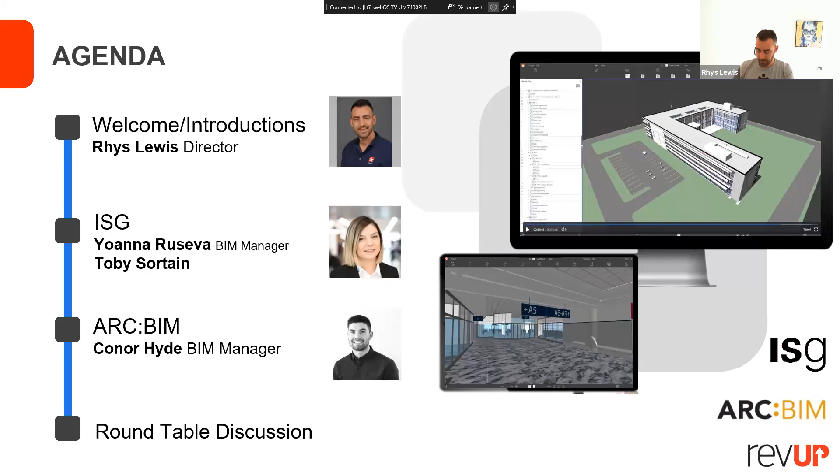Our customer base continues to grow rapidly year on year, so there's just a handful of some of the organizations that are using Revizto. Globally, it's over 150,000, so we've seen tremendous uptake, and you'll see why as we get into the presentations.

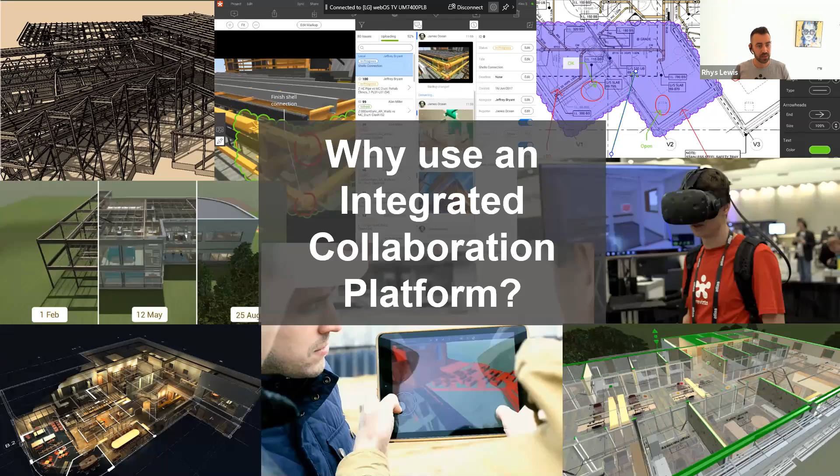We offer an integrated collaboration platform that allows project teams to communicate in a much more efficient digital way. I won't dwell on that too much. The reason we're here today is why should you consider using an integrated collaboration platform that is Revizto, or employing ISG or ARC:BIM. With that in mind, I will get straight to it.

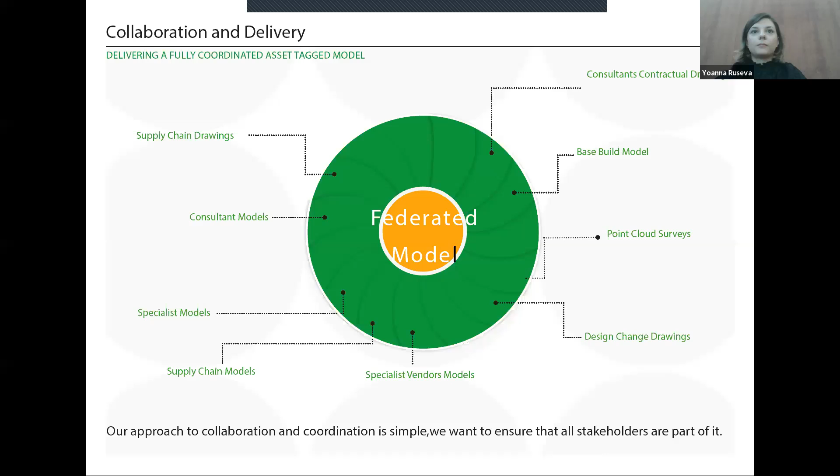After a quite big research and a lot of trials, we found out that Revizto is the right solution for us. We began our journey with Revizto in August 2019 with a simple trial of 15 users. Quickly, we implemented it on 6 fit-out projects, and we're continuously implementing it on every fit-out that currently comes in.

Throughout this year, Revizto has enabled us to have one interactive platform that has allowed every team member to view the model, view the drawings, and feel that collaboration is happening between everyone.

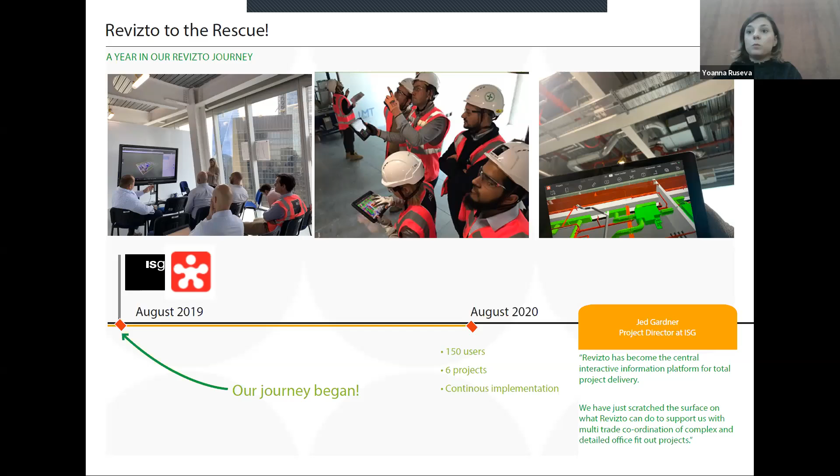Revizto has helped us immensely throughout our coordination and issue tracking progress. We usually have a week or 2 to mobilize our supply chain and ask you to prepare the federated environment. Because of that, it is really important to us that everything sits in one place. We have weekly workshops utilizing Revizto

and the models that are there. All issues that are raised are being tracked through the platform. Before, we had to spend enormous time actually producing those clash detection reports, sending them to the trades, and this would take at least 1 or 2 days.

Nowadays, we do that just automatically. In the beginning of the coordination process, we set up the automatic reports and the issue tracking progress meetings.

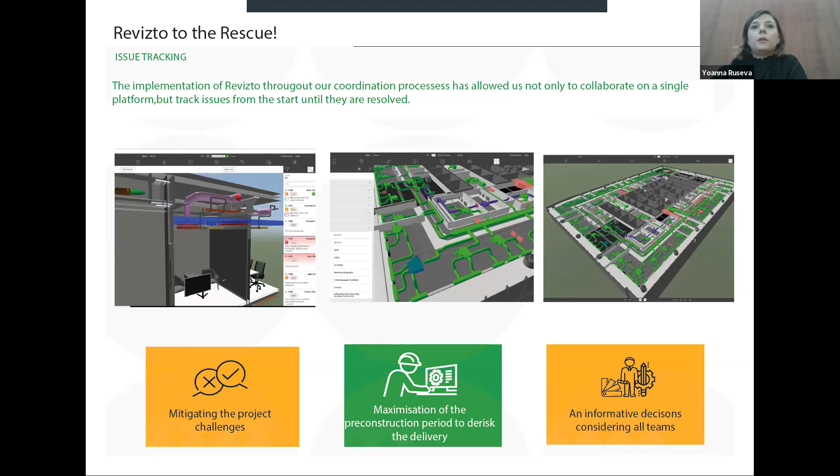The implementation of Revizto has not only allowed us to collaborate on a single platform, but has allowed us to track those issues from beginning to end, has allowed us to maximize our preconstruction period, and utilize the automatic reporting features from Revizto that are sent to our trades, to our consultants, and to our client.

Those functions have allowed us to be more efficient, have allowed our design teams and services teams to use the models as their reviewing tool.

We use our workshops with the models open, and we don't actually review drawings within the workshops. We want to make sure that everyone has the latest information to make the right decision. This has allowed us to maximize the pre-construction period and de-risk any delivery challenges beforehand.

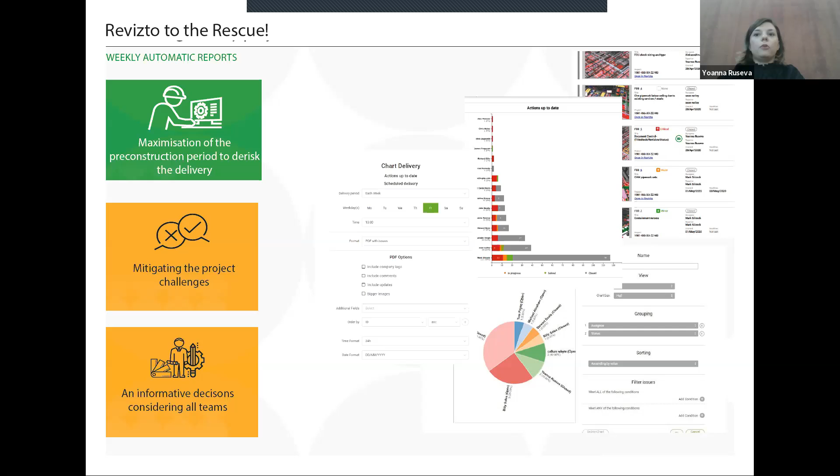We as a fit-out company have always felt that there's a missing link between the trades and smaller packages that don't have the capability to model in 3D, and the bigger packages that are relying only on the models. Revizto has helped us link everyone together.

The function between 2D and 3D overlaying has allowed us to link everyone together. Now everyone is working and collaborating in one place. All drawings are being loaded within Revizto.

During the coordination meetings, when someone asks, where am I in the model, we can quickly switch between the 2D and the 3D. We can always have an overview of how many issues there are and what's the problem area that our teams need to focus on.

Not only that, but this overlay helps us with the site walks and implementation of the snagging tools.

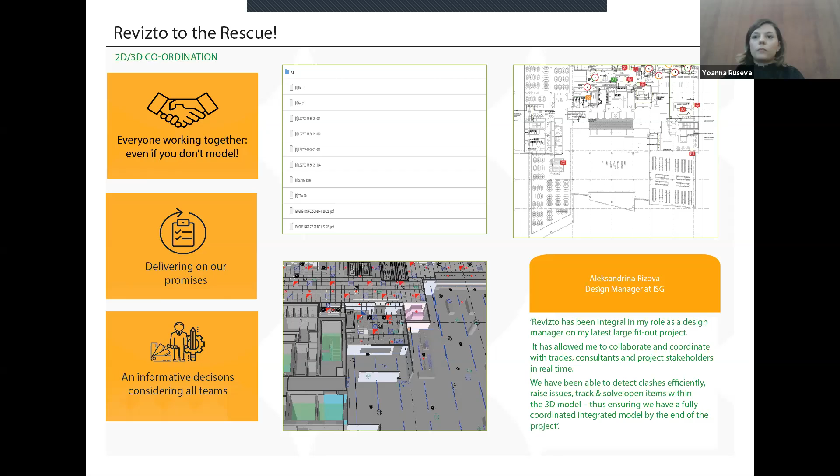As for everyone else, 2020 has been quite challenging. We had to switch to working from home and not being on site. However, in March 2020, we realized how much Revizto can help us do that.

Our coordination processes did not change when we started working from home. We had already established our cloud-based environment.

We've had very positive feedback from all our clients that everything can be built in the cloud space, that they're not required to come on site and review thousands upon thousands of drawings or snaps. Everything right now sits in Revizto and is linked. All team members are able to do it.

The only difference right now is that instead of doing the trainings on site, we do them online, which is quite nice.

The next steps for us are the utilization of the new version of Revizto on site as a snagging tool, which we have already begun doing, and the 2D 3D overlay has helped us immersively get those people who don't like the actual 3D environment. They look at the drawings and then they switch to the models.

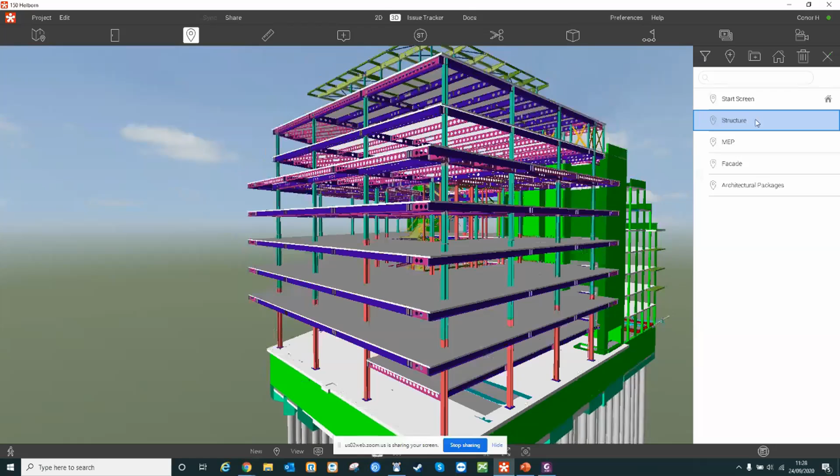For ease on this project, we've set up different views for them so they can quickly view the superstructure and substructure. They can quickly see all of the MEP services, focus on the facade, and then as we get into construction, they can just focus on the architectural packages that we currently have in the project.

The issue tracker allows our clients to see valuable past meeting information and conversations that they would have traditionally been left out of, verifying critical information like specific pieces of equipment or features within their building. Some examples of this on this particular project: the client has been involved from the start, and we were able to basically resolve some issues with the lift brackets being shown.

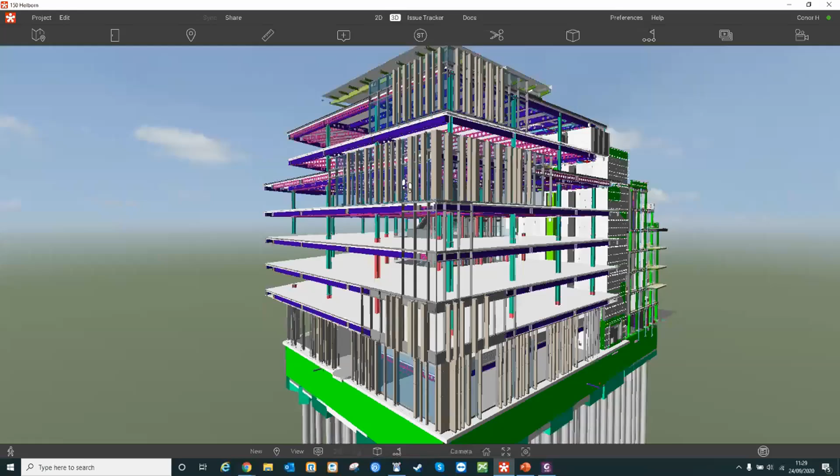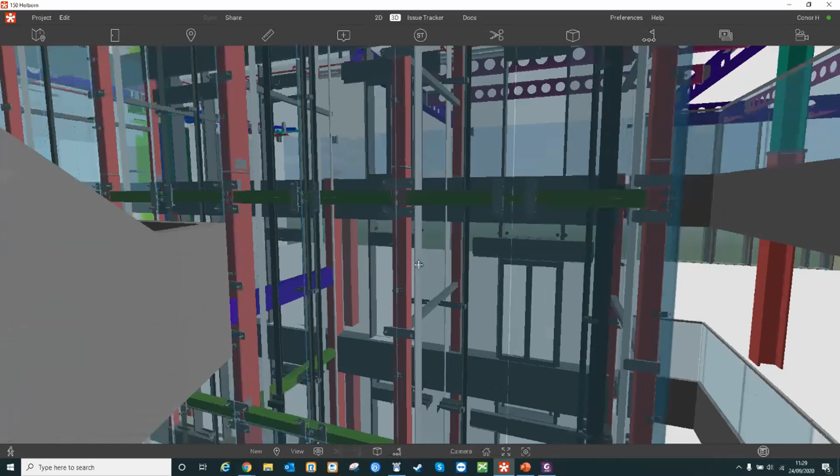During the design of this project, the lift was a central part of this building in the main atrium, and the client had noticed from the model that some of the bracketry that supports the lift glazing was quite heavily over-designed. We noticed this from the model, and it was something we probably wouldn't have picked up on 2D information. By using Revizto, the client was able to raise these questions, and we were able to have coordination meetings and resolve it using the model.

Some other issues we'd found were with certain features that the architect had designed. Specifically here was an access ladder onto the roof. You can see the architect's design ladder had come out further than when the subcontractor's design had come on board, they had fixed it back. So questions like this were raised, and we tried to find the best solution for the client, because at the end of the day this is their building. But we also tried to integrate and take on board what the subcontractor was saying about how ladders are fixed back.

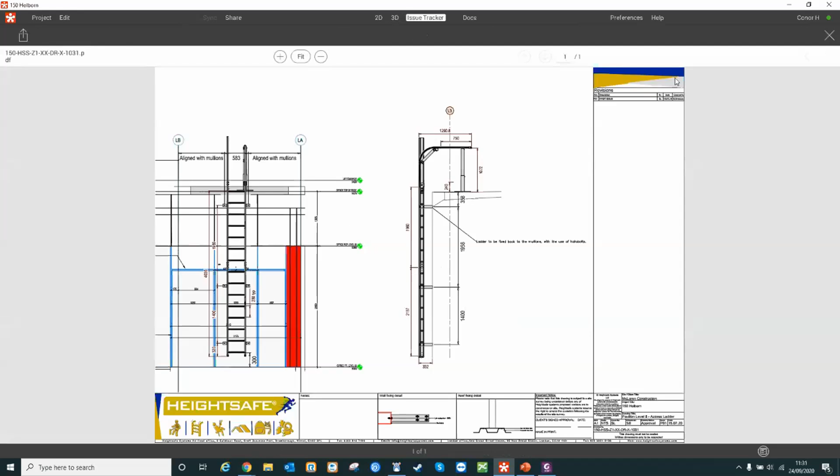Within Revizto, pictures and markups are a very important thing, along with adding comments. As you can see from the chat history, we're able to quickly open up the subcontractor's drawings, see exactly how their details were working, and get more input from them and the client together.

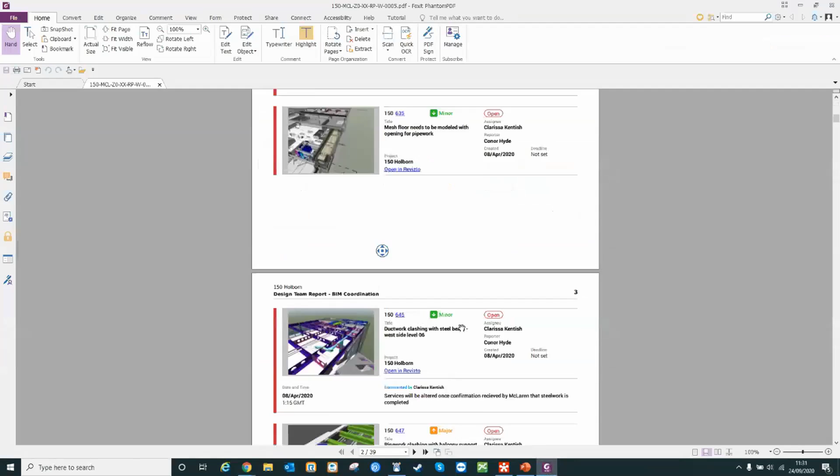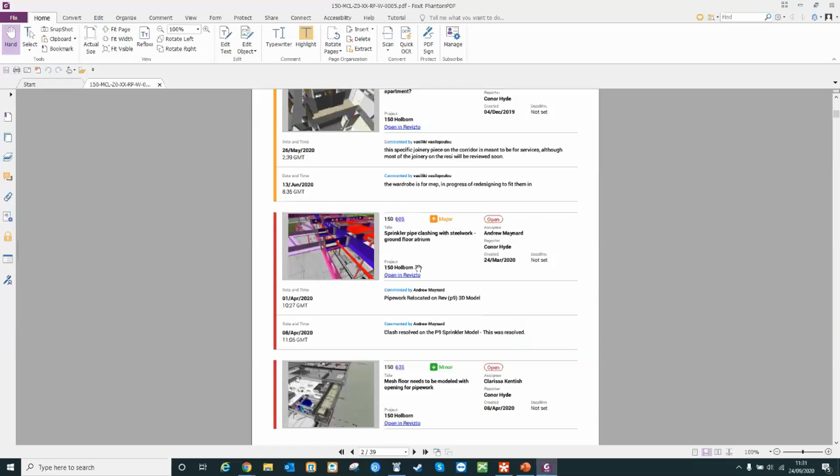Another thing that helps us with clients is having the dashboard feature for reporting. Having access to reports allows the client to see, at a high level, what's been going on in our bi-weekly coordination meetings. Reports are produced showing all the issues we've opened, closed, or that are in progress from the past few weeks, and also keep a record of all the chat history between each issue.

We've noticed our clients are now playing a more integral role throughout the project at a high level, and users can view live feeds to the project, monitor, track, and report on tasks, and understand the overall project status. Upon project completion, all project information such as COBie data and Uniclass 2015 classification can be packaged together in Revizto to help our clients and their facility managers for the lifetime of their project.

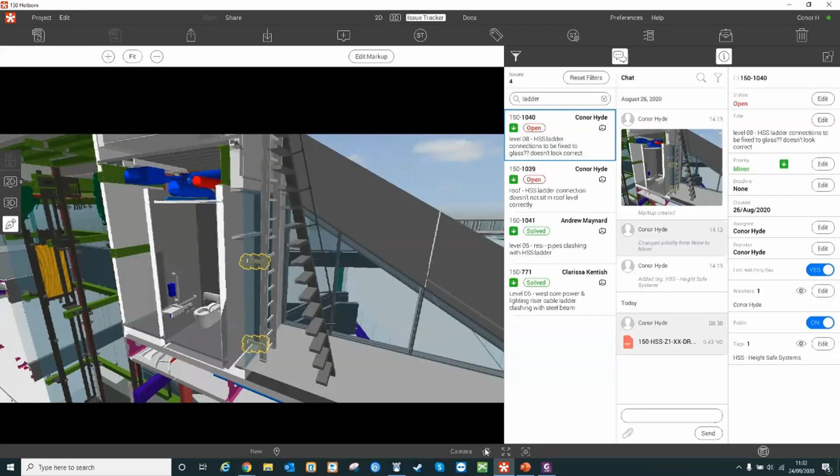I'm going to talk about how we've been using Revizto with a contractor, which is primarily our main role on most projects. Inaccurate communication and information transfers can cause major project setbacks that cost contractors time and money. By giving the contractor early access to project information, it has allowed them to reduce costly issues throughout the project life cycle. Contractors are generally isolated from the design process, impacting their ability to convey general construction knowledge to the design team, resulting in significant rework before coordination can begin.

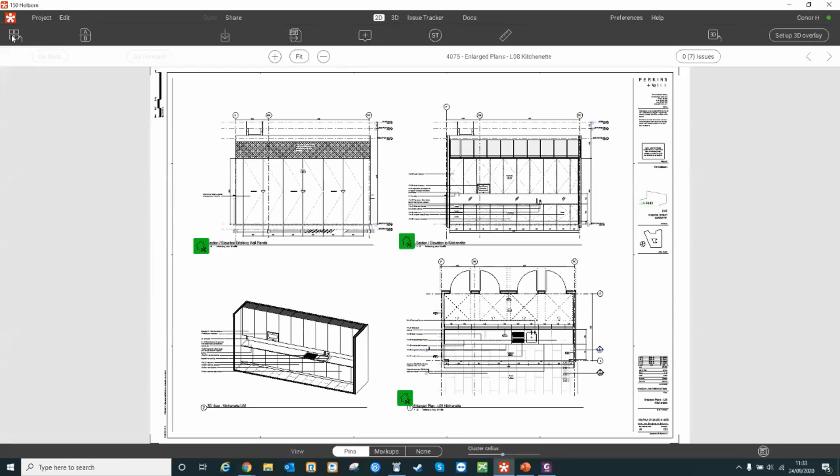Revizto allows us to overlay 2D and 3D information and gives contractors the ability to share versions across teams. Users can see all integrated sheets, PDFs, and even Revit sheets that have been brought in by users, and can be confident that what they're viewing is the most up-to-date version.

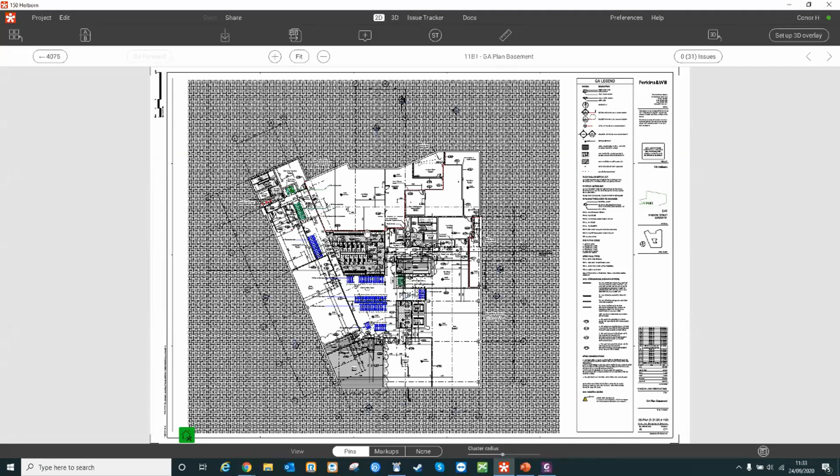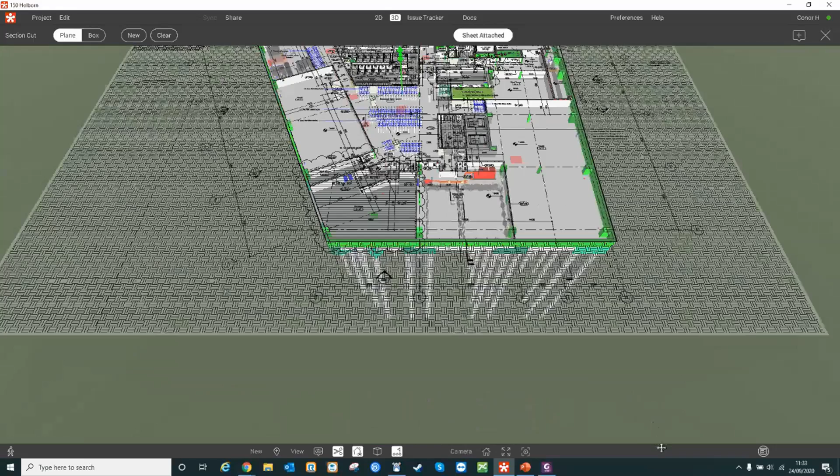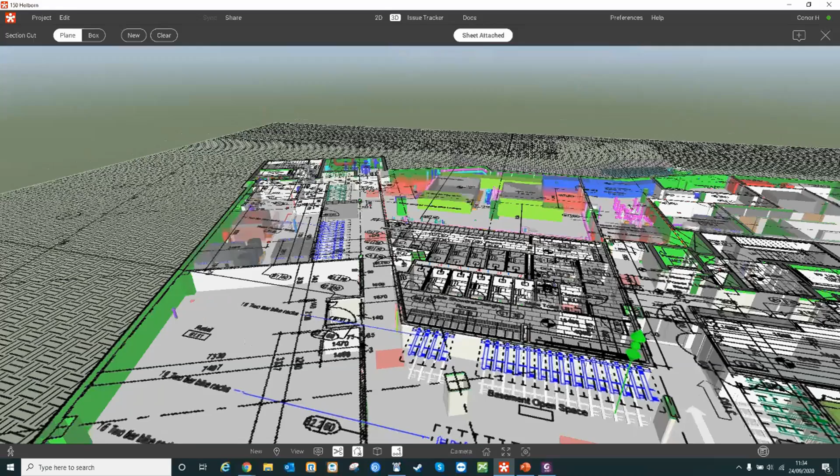One of the really good features we can sell to our contractors is the 2D feature, which you can overlay onto 3D. This is probably my favorite feature of the platform, because a lot of contractors, I don't want to say older people, but some are more used to viewing things in 2D. This feature bridges the gap between the more modern way of viewing things in 3D while keeping the ability to bring everything in 2D as well. This is one of the features that's really helped us in coordination, and it also helps us navigate buildings and helps the main contractor see what's physically going on both in 2D and 3D.

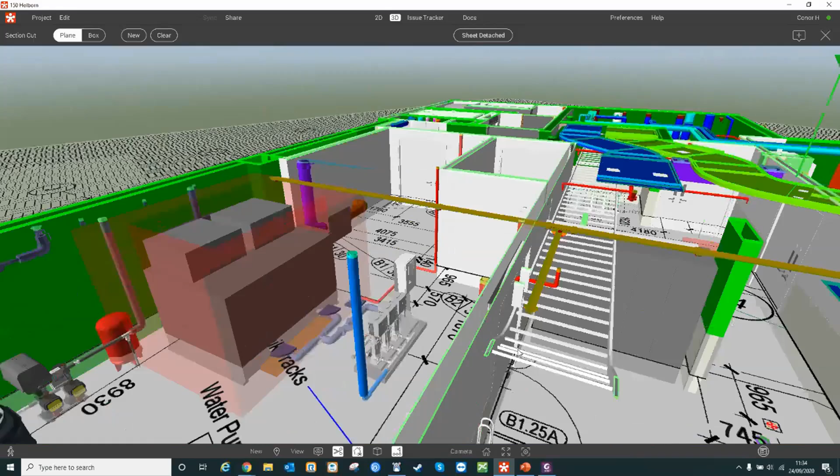And then the dashboard feature gives contractors high-level project information alongside customizable charts to view the overall project health or filter down into individual assignees. These charts provide project managers a better understanding of their project and actionable information at the project level.

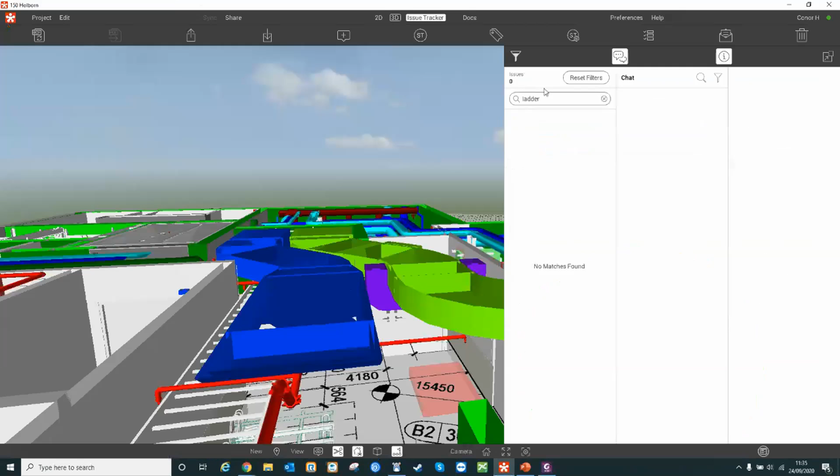Users can quickly access, assign, and manage project-related tasks such as open issue private groups. The issue tracker allows contractors to categorize issues, automate tasks, and ensure completion, driving accountability within their supply chain.

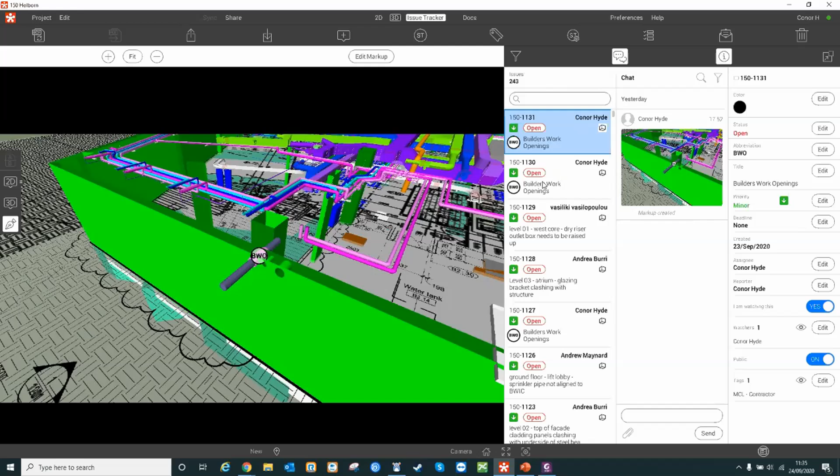We've found that using the stamp tool for focusing on builders' work openings has helped identify areas that were missed on traditional 2D drawings, and has helped create reports back to the main contractor to catch these issues before we get to site. By leveraging Revizto as an integrated collaboration platform, contractors can eliminate communication issues from ill-prepared coordination meetings and human error.

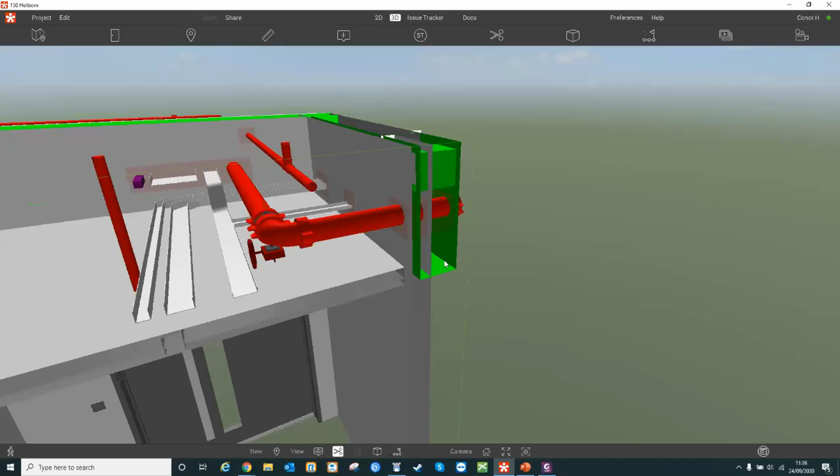Meetings on site can become more proactive by utilizing Revizto on iPads and mobile devices, virtually building and viewing all project data in real time from an easily accessible platform. Some areas we have looked to develop and assist the contractor is by identifying CDM hazards within the models, so site managers are constantly aware of what's happening around them, and also using the video tool to record stuff like site inductions for subcontractors arriving to site, so that they know exactly where they need to go by using the latest model and live project information.

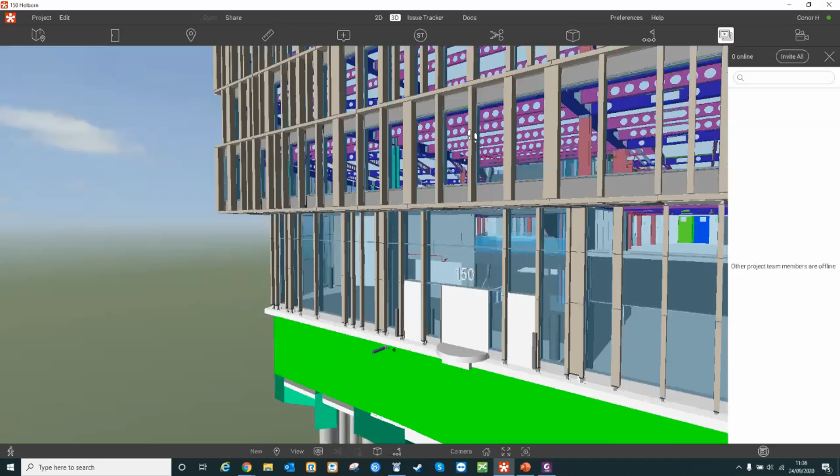So this is something we'd be looking to do with our contractors in this project, but we still have room to sort of implement these processes going forward.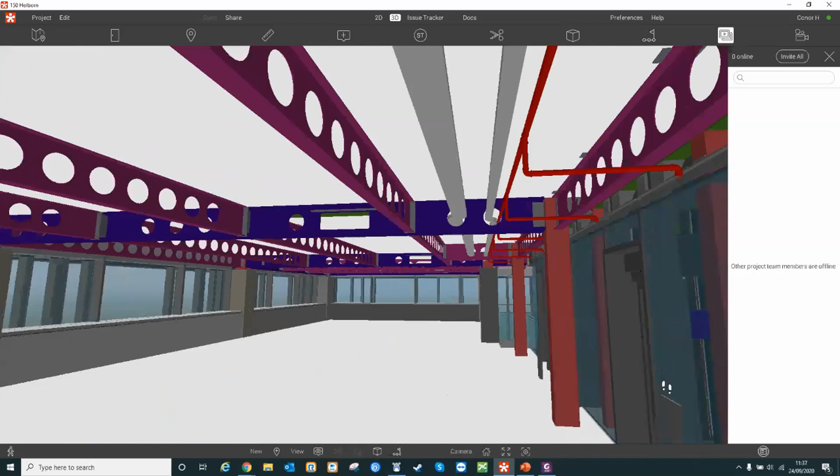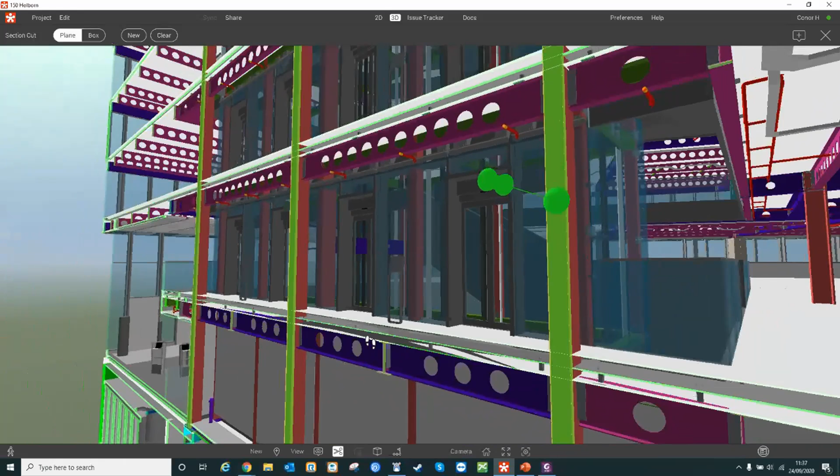So this leads me on to talk about our subcontractor use. For years, subcontractors have relied on manual processes to pass construction and design information across various teams, leaving room for human error that causes project delays and generally leads to additional costs. By using RevizTO, it allows all task team members to account for constructability constraints before they become an expensive rework. Subcontractors can overlay 2D plans with 3D models to provide better context for their fabrication on site.

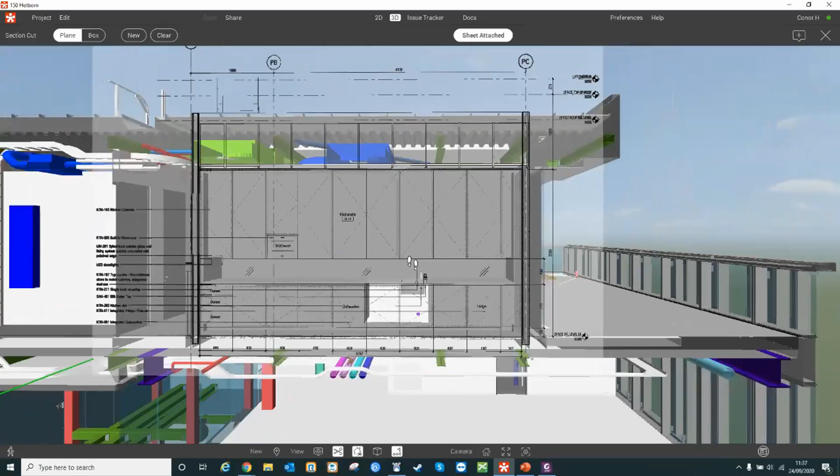So, for example, we've taken the kitchen drawings, and we're able to overlay that with the model they've produced. We've got all the notes from the drawing listed on it. We can cut that back to see the carcass of the wardrobe. We can now start to see the water heaters that are being put in, so we know that some cupboards will probably be fixed closed, and this also just helps visualize it again in the 3D environment.

Subcontractors are empowered by having access to real-time updated data. This allows them to find the information they need without having to wait for someone to return a dimension. All this can be done within RevizTO.

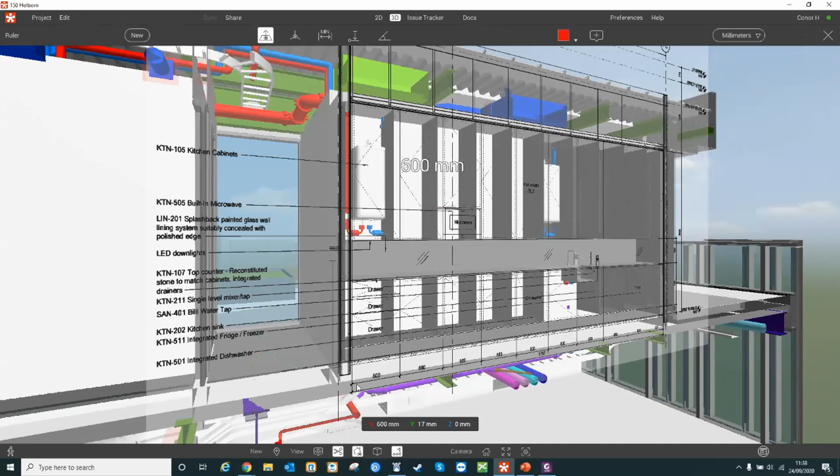Identifying and tracking issues via emails and phone calls is no longer considered to be the most effective communication method. It is now seen as a more efficient way to snap a picture from site, add digital markups, or add text, and execute all of this within the RevizTO platform. Users can directly assign tasks to other task team members and assign multiple watchers to any given task to drive accountability to ensure completion, all the while cutting down on delays from broken communication.

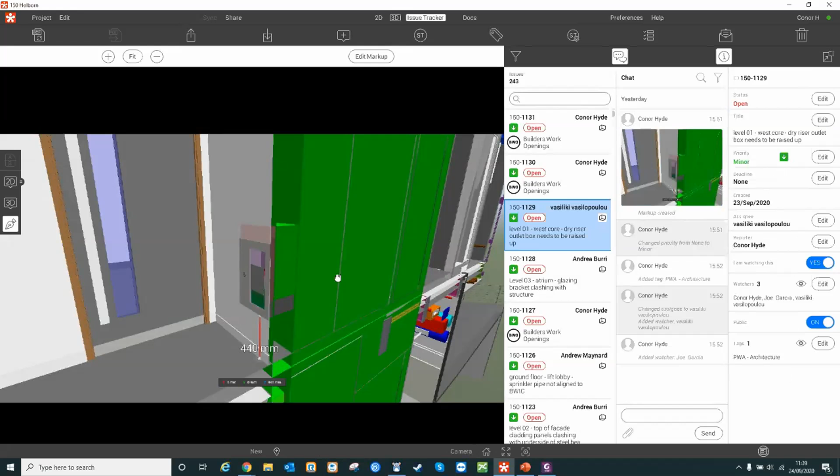RevizTO is helping us to eliminate information bottlenecks with real-time communication directly within the platform, enabling all team members to actively collaborate on site, from the office, or more commonly now with COVID, working from home. Users can communicate one-on-one or in groups, and then send instant notifications to all members of the team. Communication is all stored within the chat history.

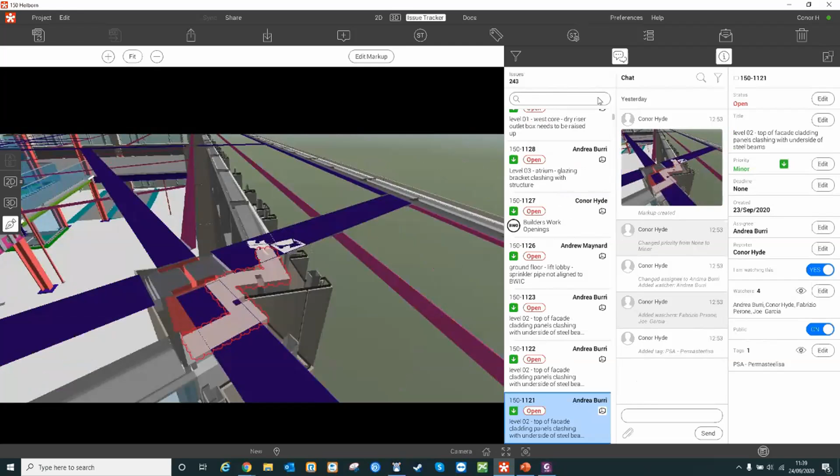And I'll just pull up some examples.

So like builders work, for example, is something that we're focusing on at the minute. So we've asked that 2D drawings be checked to make sure that builders work hasn't been missed in the models. And this is all trying to get our teams in sync to share their specialized knowledge to achieve better deliverables.

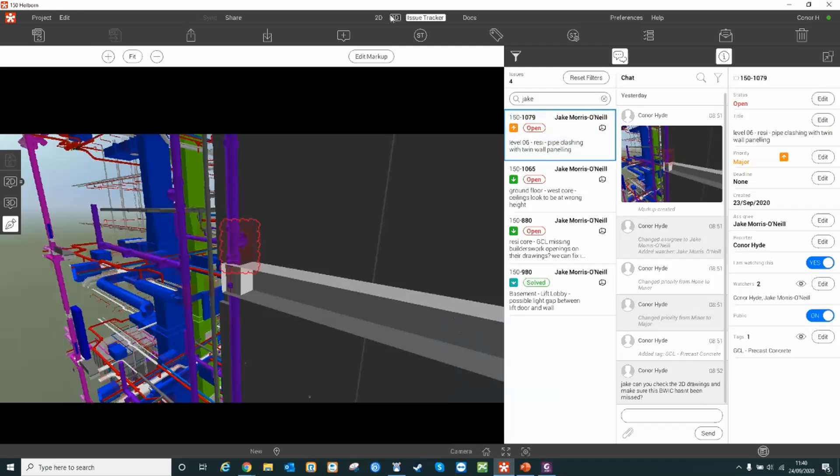Excellent work, Conor. Some really interesting comments. I've been scribbling down there myself, and it's great to see you empowering both your clients and some of the subcontractors. So where do you think the biggest benefit has been seen, if you were to compare a subcontractor to the client, who's, from your experience and your projects, engaged?

Yeah, I personally find that using RevizTO has helped us massively with the subcontractors, because traditionally they would have been just focused on 2D drawings and getting them signed off, but having the ability to actually view it in 3D and 2D together in one platform has helped them better understand what they need to do, especially when it comes to BIM and the level of detail that's required. Some subcontractors may not grasp exactly what's required, so having a platform like this, creating issues, having chats is definitely more beneficial for us to help lead them through their first BIM process.

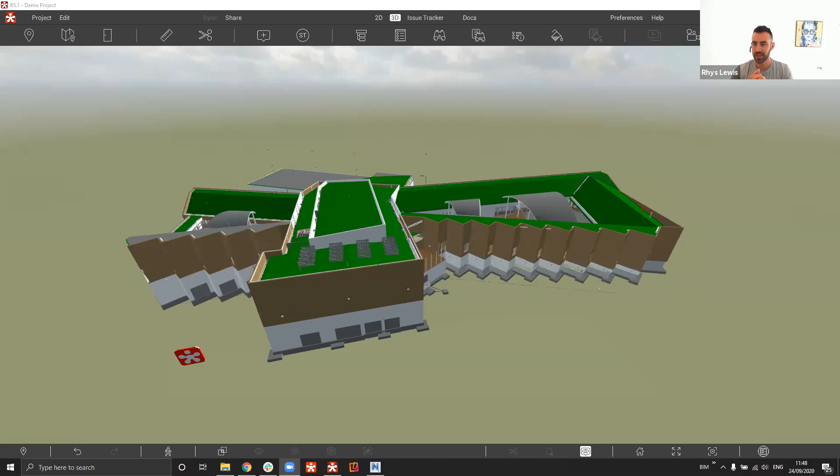Perfect. Well, lots of questions, which is great, and lots from Lewis. So as you've got the mic, Lewis, and we've got 13 minutes to go, why don't we jump into a 10-minute show and tell of what we've got coming, or what's available now, to take a look at with our clients. It's been great seeing these use cases from both ISG and ArcBIM, so thank you for those stories, and please do throw in any more questions if you have any. We've just gone into open beta for version 5, and I think as we've got a bit of time, it may be worthwhile giving you a sneak peek of that, Lewis, if you're up to the challenge. It wasn't on the agenda, but hey, why not? Yeah, no problem at all. So over to you, Lewis.

RevizTO 5, as Rhys said, is due for release pretty soon. A massive overhaul has happened. A lot of it is behind the scenes, and as a result, the interface is very similar to what people have known and used in RevizTO 4. So people that know RevizTO 4 aren't going to be too shocked by what they see in RevizTO 5. You've got that continuity and ease of knowing what you're looking at without having to get used to a brand new system, even though a lot of what we're doing has now changed.

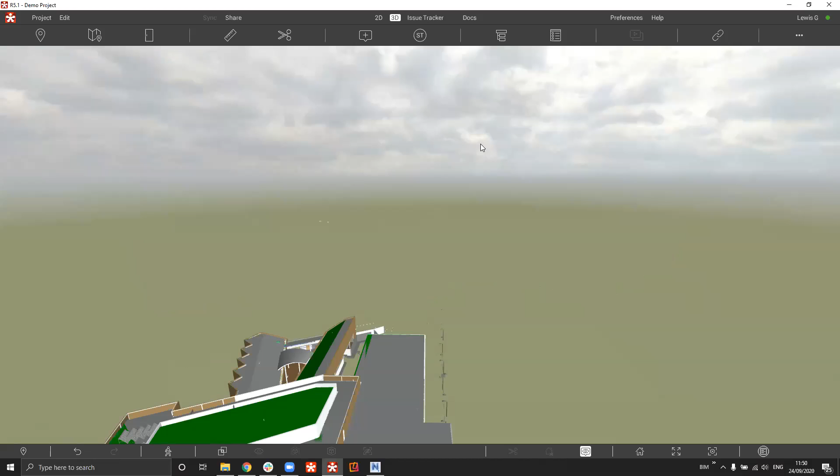Key things that have changed in RevizTO: we've now got an undo and redo button, which is going to be quite exciting for a lot of our users. It's surprising in 2020 to say we've just added that, but it's finally here, and it will undo anything we do in the 3D space. So if I change camera location, rotate the model, we can then undo back to previous locations, and redo to change that information. It won't undo anything in the issue tracker, but it will undo anything we do in the 3D view, so that's quite nice to finally have inside RevizTO.

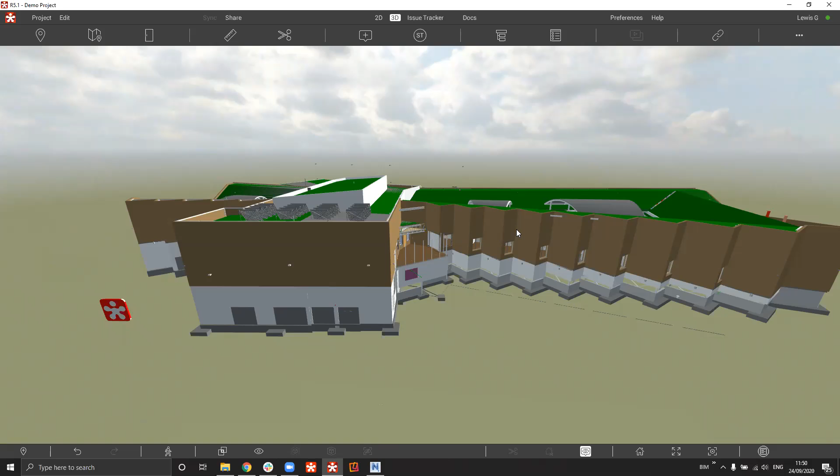We've also started to add buttons where before it was quite difficult to set things up. So we can now select components, and if we want to hide them, we've got a hide button. We've got these brand new buttons down here - turn clashes on and off, show everything, isolate in transparency, isolate components out, and hide things. In RevizTO 4, you'd have to go to the object tree and try to turn things on and off, and it was difficult to create those views the way you'd want. Whereas now I can just select the mechanical model, isolate that, and pull that information directly out of the system.

This works really nicely to allow you to set views up and store these into the project. Conor was mentioning the views he set up for different users - he'd have a view set up for a structural view and a mechanical view. It's fair to say that sometimes that wasn't the easiest thing to do. If you're going purely on model basis, it was okay, but if you wanted more detail, it was quite difficult to set the views up in specific ways.

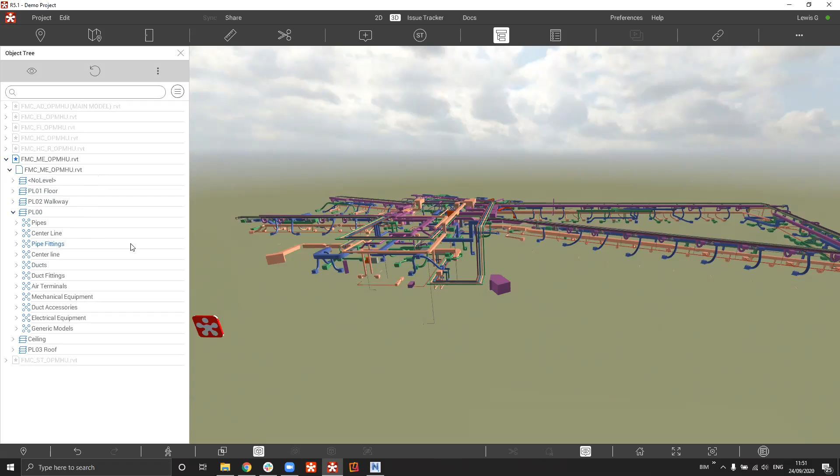Whereas now we've got the option to break models down by level, then by category. So for instance, I can now just take all my level 0 pipes and ducts, right click, isolate, and pull that information out directly.

The way in which we can customize the views so that people can see what they are actually interested in, rather than what RevizTO thought they were interested in, is a nice feature to have. These can be saved as views, and as the models update and objects get added, it will automatically keep those views growing on the project.

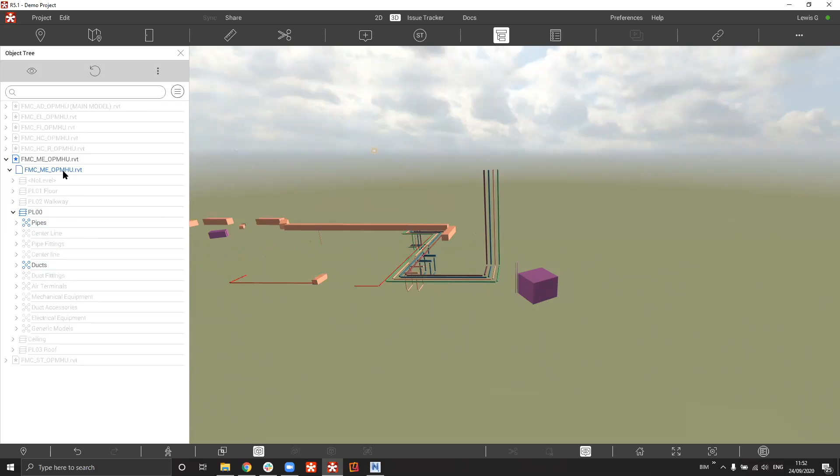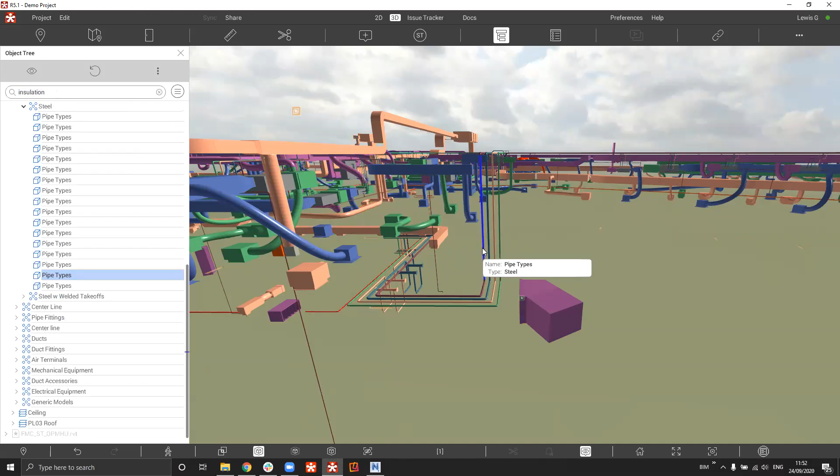Another nice feature we've improved is our search bar for objects within the object tree. One thing I always find annoying is when I select a pipe in the mechanical model, I'm actually getting the insulation and not the pipe itself. So we can simply type in the word 'insulation,' and it will find all the insulation in the project, and we can use the hide button to get rid of it. Now when I select a pipe, I'm actually selecting the pipe, and the properties I'm seeing are based around the pipe itself, not the insulation. This is a really useful new feature.

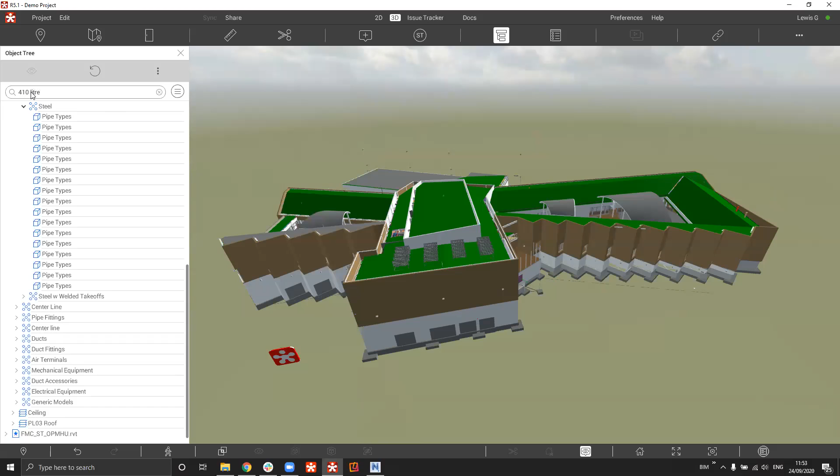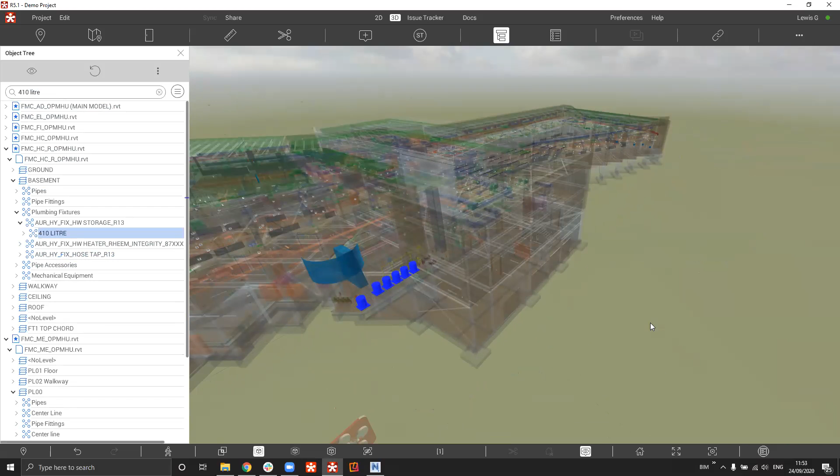We can also use the search bar if you know a particular size of component is in the model but don't know where it is. I know I've got some 410 litre water tanks, so I can search for that, isolate in transparency, and it will highlight those components for me in the model. Someone mentioned there was 410 litres, I had no idea where they were, and straight away I can see where those water tanks are in the project. The search bar and the way information is now structured in RevizTO makes it a lot easier to customize views and control what you're seeing.

Also new with RevizTO, the key thing is that RevizTO 5 looks the same as RevizTO 4, which most people will want, but there's a more advanced toolbar you can access by clicking on these three dots, which brings up the new features. We imagine it'll mostly be the BIM specialist people on the project who want to use these buttons initially, while the normal user keeps it as it was. They can switch between toolbars, and as they use it more, they'll progress into the new features and can access them quite easily.

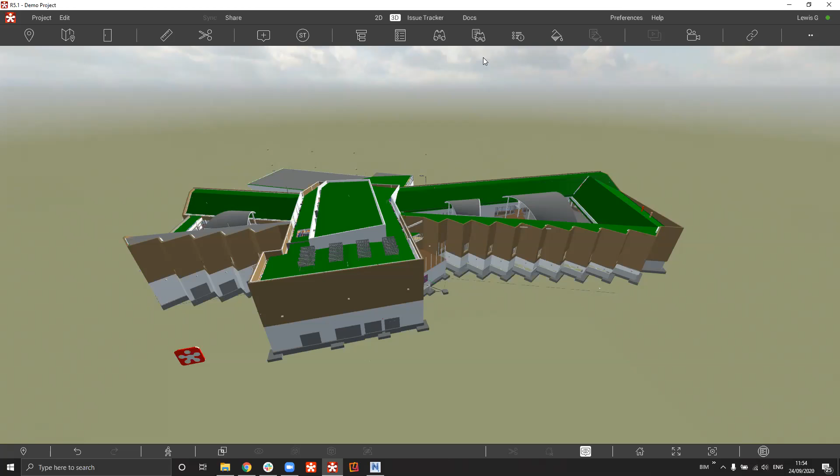One of the first things we've got is the ability to find objects. We can add property conditions - I can type in, for example, 'system classification,' and pull that out. From here, we can say show me all the domestic cold and hot water, and find all, and it will show me all the domestic cold and hot water. These can be saved as search sets within RevizTO, so if you're going to use them repeatedly, you can save that search and get access to it. This adds to what Conor was doing before with his views for different people - he can now work with search sets too.

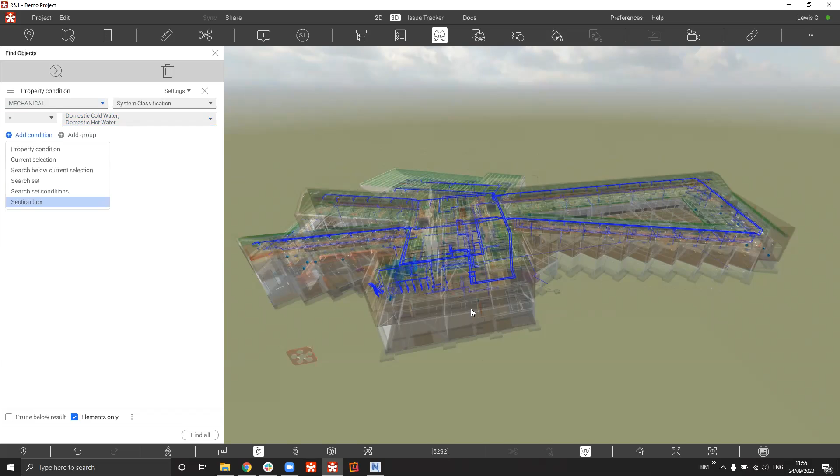In addition to search sets, just looking at the whole model, we can also add a section box into the search. Now I have to guess where it goes because it's hidden - there we go. So we can now set up a section box that's in a particular area of the building. In this case, I'm going to set it up just for this small section.

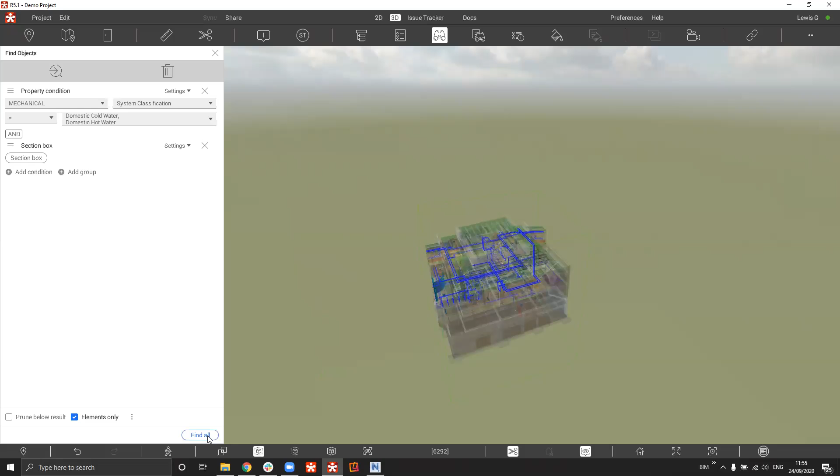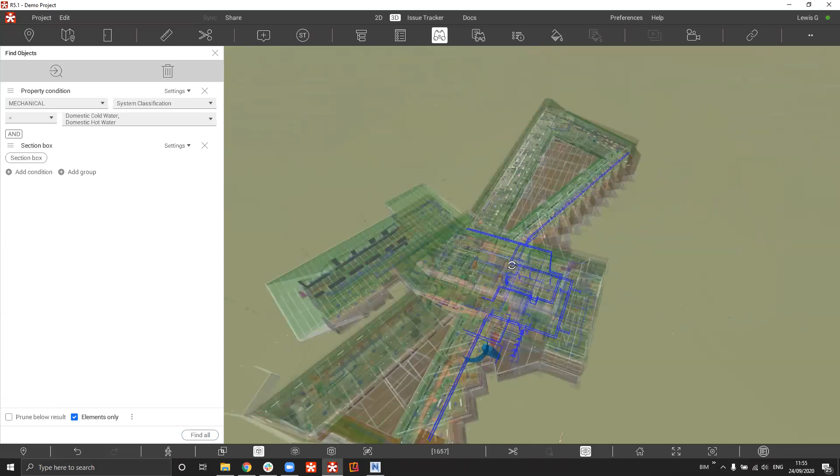When I did the domestic cold and hot water search, it selected around 6,000 objects. If I click done now and find all, it's only found 1,600 objects. If I turn off the section box, you can see the objects selected are the ones that actually intersected with that section box. So it's now possible to set up search sets looking at floor-to-floor section boxes or zoned section boxes, whatever it is. Obviously pipes that go into more than one area are always going to be a problem, but at least it breaks it down and keeps things more local, so you can have specific areas within the search sets. That's a really useful feature of the search items.

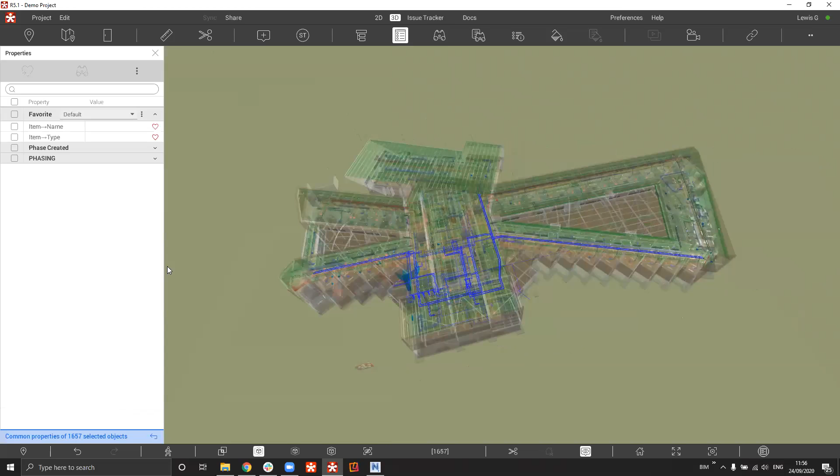Another nice thing we've got now is our properties have been improved. I'm just going to isolate this out and hide my insulation. In the past, if you were looking for certain properties in RevizTO, you'd have a huge long list of information to scroll through, because it's taking all the data out of Revit or Navisworks or whichever system you're exporting from. What we can now do is create favorites.

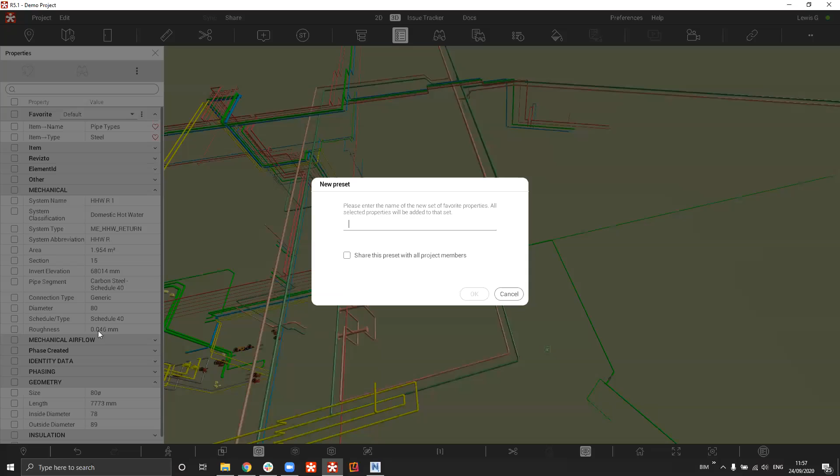For example, I want to create favorites specific for my pipes. So we can say I want my domestic, my classification, and my system type. I also might want things related to my geometry, like my length and my diameter. We can then add this to our favorites. I'm going to call this my pipe favorites, and this now is generated at the top. I don't want those two, so I'm going to remove those.

What that means now is I don't have to look through the whole list of data in RevizTO. I've pulled out the bits that are interesting to me, and as I click through the model, I'll see that data update for different purposes. This is a really nice feature, as different users on the project can have different favorites and see the information they're interested in. The favorites also act as a quick property, so I can just hover over a component and see those properties directly on the mouse.

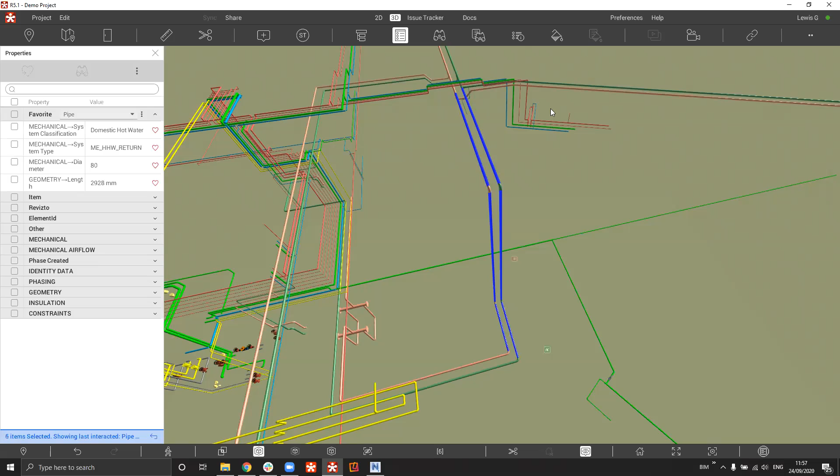One last thing with this process - I'm just going to give an example, selecting a couple of pipes rather than doing a whole thing. So I've selected these six pipes. We can now go into our selection inspector, and the headings for the selection inspector are based off the favorites we've created. So I've got domestic hot water, system type, so I can see flow and return. These happen to all be 80 mil diameter, but I've got the length here.

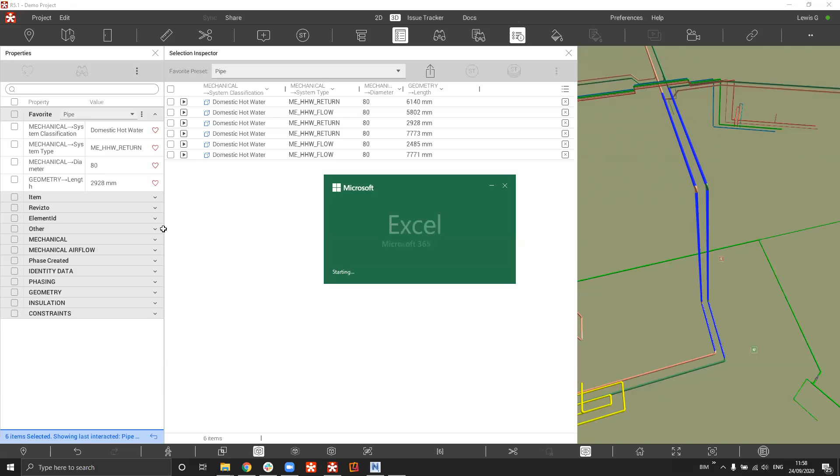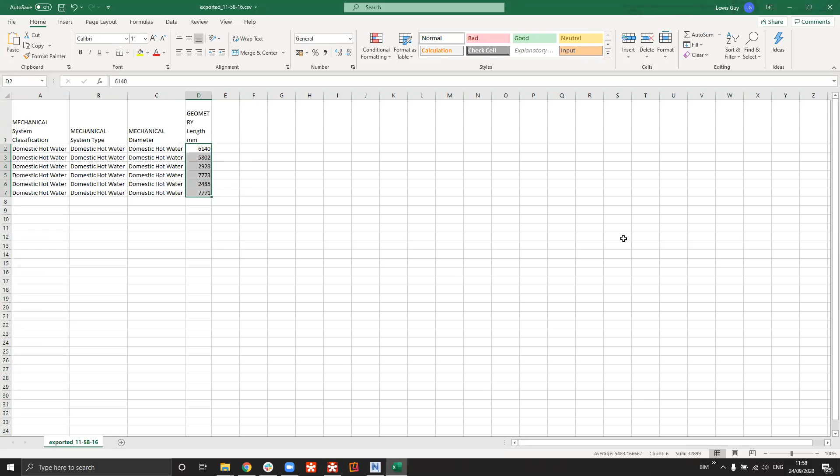We can now actually export this out to Excel. I'm going to save that to my desktop and let's just open that. We can now pull that information out to Excel, and assuming this was more information than just these six pipes, I can take my total count and work out my total length of pipe on the project, or my total volume of concrete. Whichever favorite headings we use to generate this, we can extract that out as headings in the model.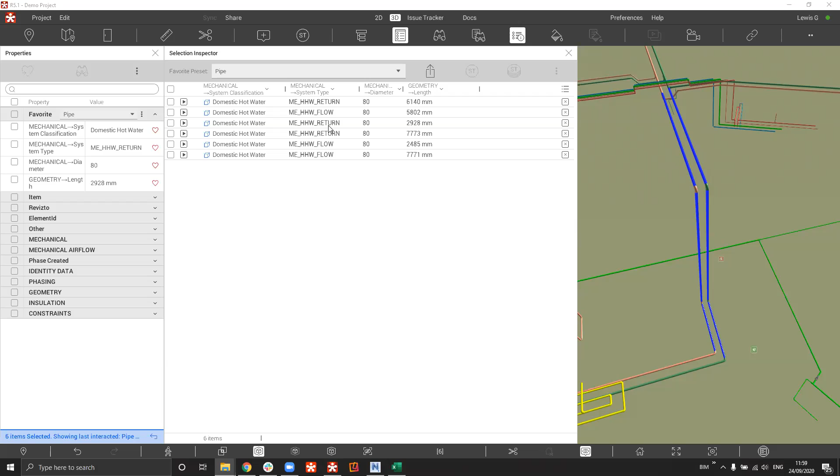So we're now making Revizto not just used by the BIM team and the design managers, construction managers, and design teams. We're now saying that people like the QSs on the project can actually start working in Revizto and extract the information they're interested in, things like length, volumes, diameters, and all that kind of information. They can pull that into Excel and start working with it in other systems, or create formulas to generate costs and things like that. So with Revizto 5, it's not just for people who've used Revizto 4 - everyone on the project can definitely find a use for the Revizto 5 platform.